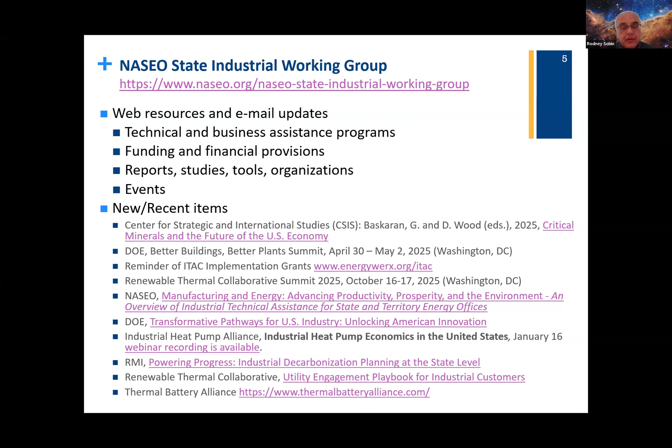I think, Neil, we have ACEEE reports as well on our webpage, to which, yes, you're quite welcome—we alert our members and the wider community. And we also want to point to a newly formed Thermal Battery Alliance. Next, please. So some other activities.

Some of you on this may recall our last webinar in January, which was focused on Pennsylvania and the Pennsylvania RISE PA program, as well as technical assistance offerings. Prior to that, we had a forum focused on industrial heat electrification and storage. We also had, earlier last year, a focus on industrial demand flexibility and a forum on state and local pollution prevention programs and small business environmental assistance. I also listed a response to a DOE request for information on transforming industry, to which we contributed.

We are very interested in your views on potential topics for future webinars and forums—a few possibilities are listed there. We are also very interested in your state's case studies, experiences, different organizations, and we'd love to share the great work that you're doing and have peer exchange.

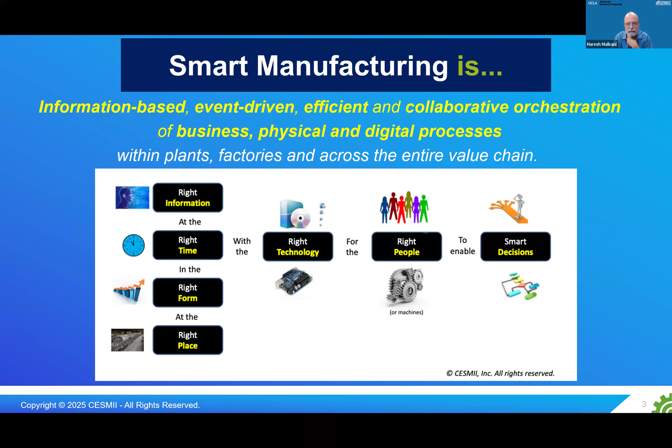If you look at the bottom left, it's all about descriptive analytics, meaning you need to know what's going on. And if you start there, the first thing you do in your manufacturing process is have some way of measuring what you're doing. So you've got sensors, and you could have advanced sensors. One of the examples I'll show you is a sensor that did not exist for a particular use case, and we helped fund the creation of that sensor.

Once you get the sensing done, you're basically creating data, and that data can be immediately used for control purposes if it happens to be something fairly straightforward and simple. So for example, speed control, tension control, or something like that in a piece of equipment—then you can immediately use that data in a control fashion.

But more often, data comes from different places in your manufacturing operation—different sensors, different parts of the process, different parts of the equipment. Therefore, what becomes important is something called contextualization, which provides you with the context of what you're measuring. So if you're measuring temperature, it's on a part being manufactured on that machine at this particular time, at this particular phase in the operation. That's all context, and that's really, really important and powerful.

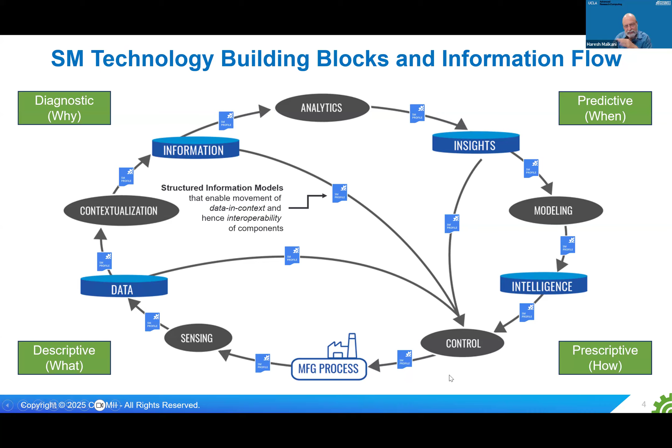So CESMII, we have about $200 million to work with. Half of it comes from the Department of Energy. The other half comes from our members in terms of cash and in-kind contributions. It's a public-private setup that's housed at UCLA. Our headquarters are in Los Angeles. Our staff is about half in Los Angeles area. The other half is across the country. And our goal is to improve productivity and competitiveness through smart manufacturing.

And like I said before, it's all about sensing, control, modeling, analytics, platform. And then the information piece of this is all around reducing the cost and complexity of creating these kinds of systems and then proliferating that for our manufacturers. So within our ecosystem, within our membership, we have representation from manufacturers, systems integrators, machine builders, technology providers, as well as academia and labs, and a lot of the nonprofit organizations and institutions that are part of it. We have about 210 members today, and it's been growing pretty steadily.

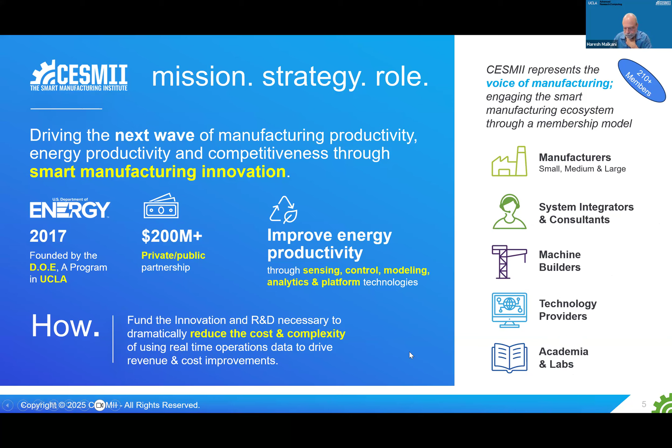So all that stuff is good. What have we done? If I look at like three pillars, the first pillar is all about developing smart technologies to solve hard problems for the manufacturers. So this is where we do a lot of collaborative projects, and we take a look at this oval, and then we got projects that have addressed either certain parts of the oval or the entire oval, depending on the complexity of the problem. And we focused on improving productivity, improving energy usage, quality, yield, and so on. And here are some examples that in the steel and cement industries, we've demonstrated anywhere between 10 and 25% reduction in energy usage through use of smart manufacturing technologies.

The second pillar here is around accelerating smart manufacturing adoption, particularly in small and medium manufacturers and the supply chain. And here, our platform technologies have enabled anywhere from 25 to 50% reduction in the implementation costs of a smart manufacturing solution. Again, these solutions are addressing performance and productivity, but at the same time, as you proliferate those solutions, you're also reducing the cost and complexity of doing so. And this is particularly important for small manufacturers that could be part of multiple supply chains, not just one.

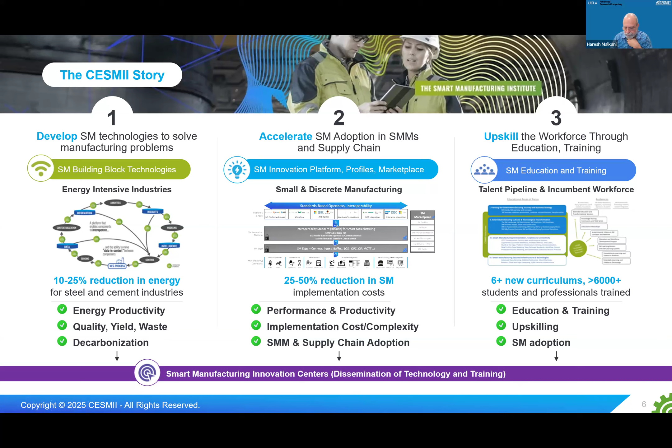I'm going to briefly talk about what each of these blocks in our strategy covers: technology, knowledge, and ecosystem. Under technology, there are two main things going on. One is collaborative projects we've used to demonstrate the impact of smart manufacturing in multiple industry verticals—15 of them are shown here—for small, medium, and large manufacturers.

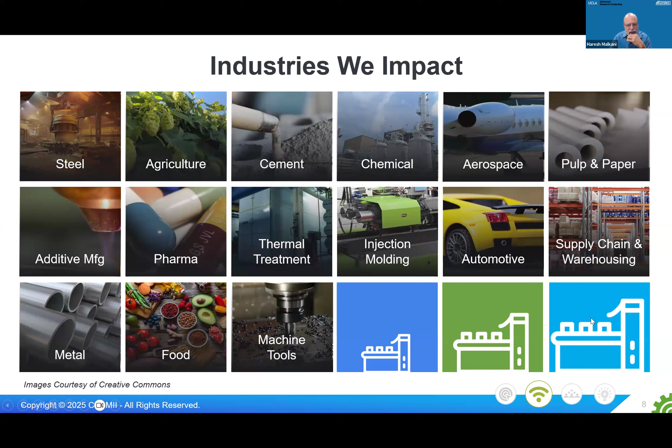Through the 60 or so collaborative projects, we've had use cases that demonstrated the ranges shown here: about 10 to 35% in energy reduction, 10 to almost 40% improvement in productivity for manufacturers in various sectors, and 25 to 50% in implementation costs. These ranges exist because, for a small manufacturer where we've made an impact on productivity, we've had cases where they completely eliminated quality problems or downtime, so those numbers are really high.

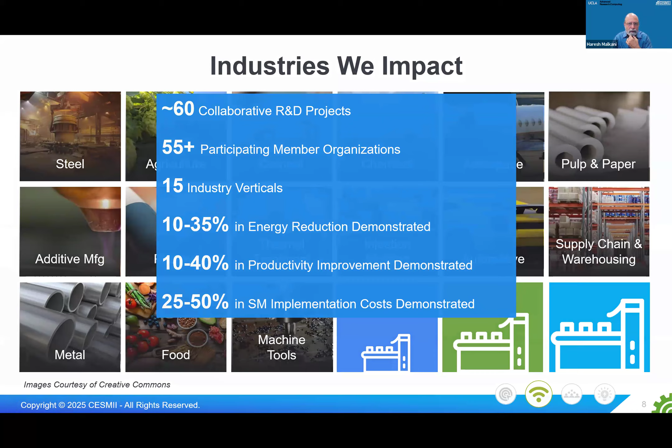The second piece of technology is around the platform—how information moves within a smart manufacturing system. This matters because today a lot of smart manufacturing systems are created by technology vendors with proprietary pathways for collecting, organizing, and utilizing data. If you look at this stack, at the bottom are your physical assets, then some sort of edge that takes the data in and feeds it into a platform, and data is accessed from that platform for different applications.

There's nothing new about this particular stack. What's new is the manner in which data is collected, transmitted, stored, organized, and made available. We are proliferating a standards-based approach to doing that. We don't have skin in the game in terms of proprietary technologies—we are an ecosystem of multiple technology vendors. So we can create best practices and specifications that others can adopt, making this ecosystem more affordable and interoperable, where a best-of-class provider of an HMI or SCADA system can play in that same ecosystem without worrying about proprietary technologies. That's the basis of what we're trying to do here.

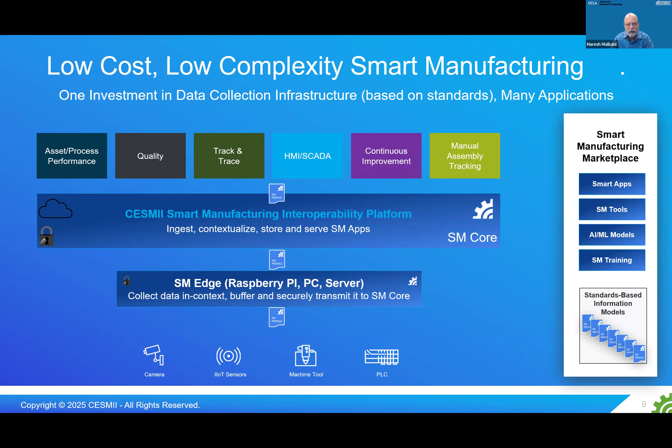The second pillar is around education, and here our goal is to support the ecosystem, expand that network, train them, equip them, certify them. We have curriculum and tools that we generate through our partners, both in academia and in industry. We develop those curriculum and technologies, verify them, and market them—this is all the content, and this is where it is delivered.

We do this through three different mechanisms: consulting support, education support, and technology support. Technology we already talked about. Education support could be through curriculum available online, or through training programs and certification programs we have in our institute. Consulting is where they're looking for a set of experts in certain fields, and through our ecosystem we can make those experts available to help and guide you.

In terms of that process, we have several opportunities that raise your awareness through demonstration days and roadshow opportunities that CESMII does across the country. We actually have a truck that goes out. We also have half-a-day workshops for leadership, because a lot of this around culture and making sure manufacturers understand what smart manufacturing is and how it can help them starts at the leadership level for sponsorship. We have boot camps for folks that want hands-on training, including a smart manufacturing learning kit, the size of a suitcase, that you can take around, along with curriculum and software for hands-on training.

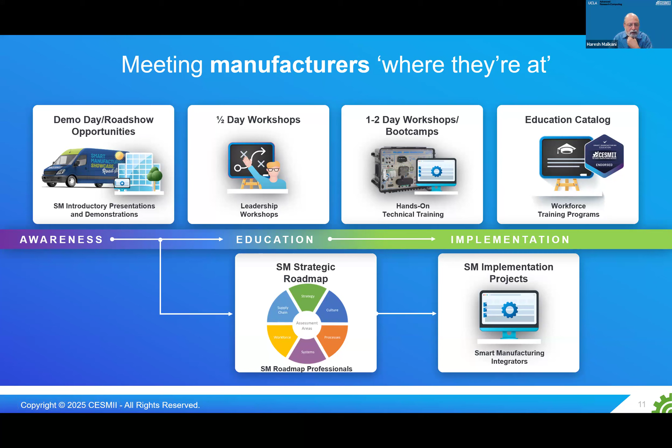And then all this stuff results in implementation projects. There are various ways in which this can be supported for manufacturers, depending on the type of project and the type of funding opportunities they would like to pursue.

And the last piece of this is the ecosystem. We have 210 members. I won't go through all the logos here, but we have roughly 60% representation from industry, 40% from academia, national labs, consultants, and nonprofits. It's a fairly rich ecosystem.

Like I said in one of my previous slides, about 50 to 60 of these members have been involved directly in some of the collaborative projects. Others have been involved in developing our platform technologies. So it's a good family.

Our innovation centers around the country are all listed here at the bottom, and they've been doing fantastic work in assessments and surveys—over 1,000 done. We've now reached about 7,000 a year in terms of our run rate for the number of students educated, and the upskilling of workers is 6,000 a year. So this is rapidly growing through our ecosystem of partners.

You are in the Northeast Pennsylvania area, so the closest one for you would be RPI. Okay, so that's basically the overall story of CESMII and smart manufacturing.

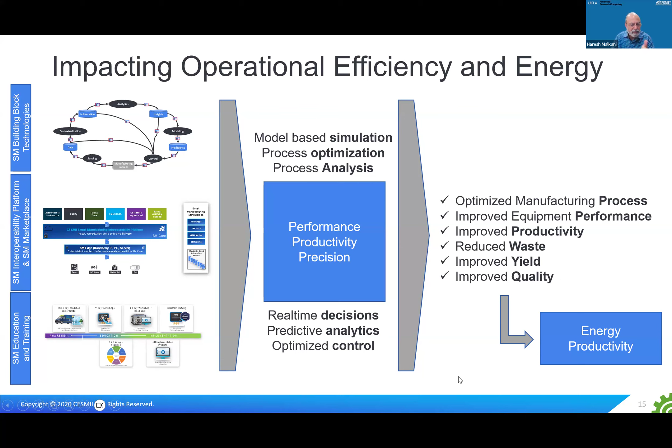But before I get there, at a high level, what I've shown is that all of these things on the left-hand side—the building block technology, the platform technology, the education and workforce—essentially end up producing an optimized manufacturing process that impacts things like performance, productivity, waste, yield, and quality. Now, we don't change the manufacturing process. The way we impact energy is by making all of these other things more efficient, so that you eventually have an impact on energy. The examples we're going to show will illustrate that concept.

Out of the 60 projects we've done, we've laid them out as an example, marching along this oval: here are examples where we've created new sensing technologies, here are examples where we've created some of the platform technologies for contextualization and analytics. On the right-hand side is the predictive model, and then finally bringing it all together for the prescriptive model-based control of the manufacturing process. You can see the types of industries we've touched upon here in these examples—a lot of cross-cutting work we've been able to do.

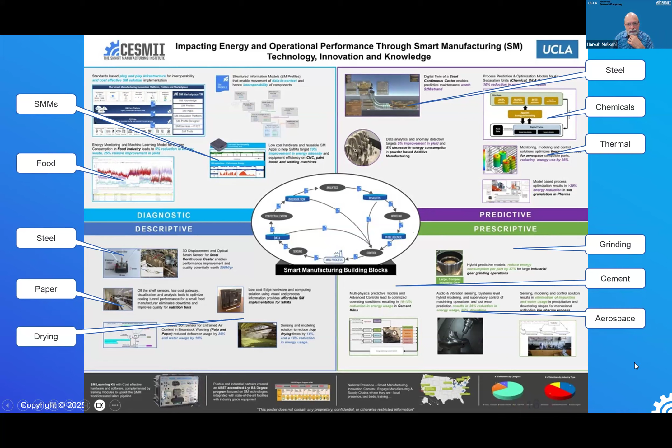And with that, we'll go over to the first use case. So Mark, I'll have you spend 3 to 5 minutes on this one, because this is really a fantastic example of how we've been able to use smart manufacturing technologies for a key industry sector.

All right, thank you, Haresh, and I appreciate the opportunity to come talk to you all here. Over the last 4 years, we have been involved with our industry partner, Argos USA, a large cement producer. There are no small cement producers in this country.

What we were looking at in particular was the process used to create Portland cement. This has been going on for over a century. We basically make it the same way we've done over these multiple decades, though there has been refining of the process as they go along.

They use a lot of sensors primarily to protect the equipment used in the manufacture. These are multi-million-dollar investments. Basically, the process of making cement is taking limestone, calcining it, then taking that lime, calcium oxide, and converting it into calcium silicates. Those calcium silicates, when ground, form Portland cement, which we use in huge amounts throughout the US and worldwide.

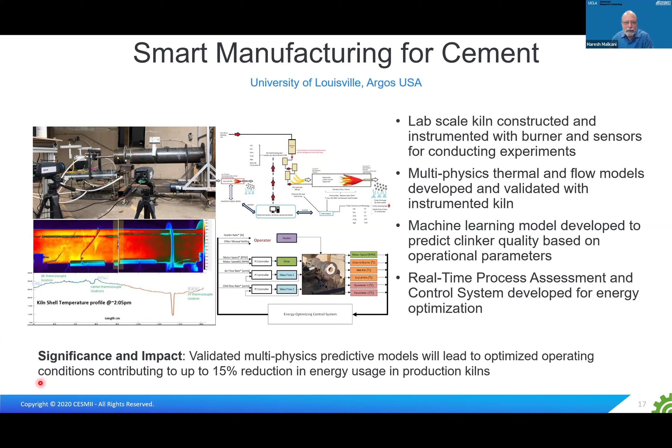Thank you. I'm going to show you a couple other cases. Mark, you're welcome to hang on, and if there are questions at the end, you could probably help answer as well if you have time. Otherwise, I'll take them on. I'll stay.

Here's an example of the steel industry. For the steel industry, if you're familiar, the continuous casting process is used by, I don't know the exact number, but like 90% of steel producers or something like that now. One of the critical things there is to be able to detect where the molten metal becomes solid in this process, and that controls to a majority degree the quality of the slab that comes out.

One of the challenges there was to be able to measure exactly where that occurs and in what way. So there are two different sensors that were created by Missouri Science and Technology. One was a 3D displacement sensor that sits on one of these wedges, and then also an optical strain sensor that also sits around that. They have to operate in this harsh environment. That was one of the collaborative projects they did.

And then Purdue developed a digital twin of the caster so that you could run it, hook it up to real-time data, and use it as a tool for engineers, both in process development as well as in maintenance, to do that predictively. So again, a lot of good work was done here collaboratively - model development, sensor development, and then bringing it together.

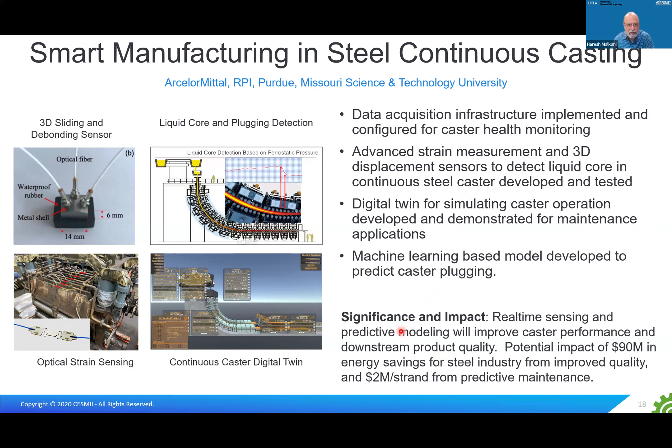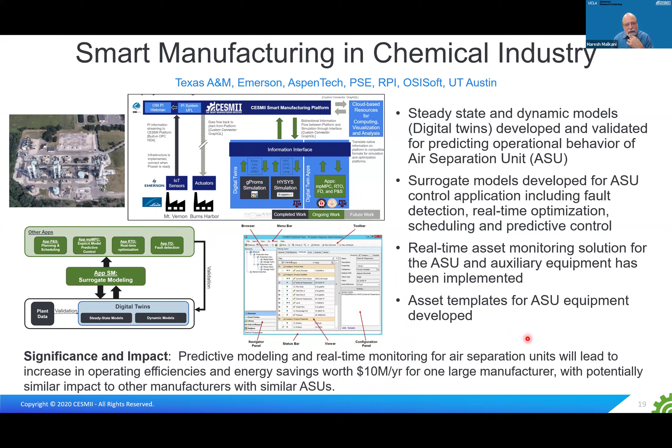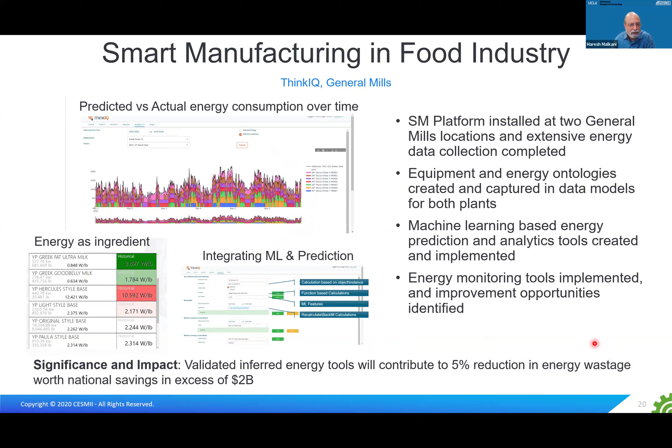The other thing they did here is that they did this in two plants. The first plant actually had the sensors on the ground. The second plant didn't, but they used the same model from the first plant, applied it to the second plant, and it came out to be pretty close to what they would have wanted. Of course, some tweaking is required as always, but they got them started pretty quickly.

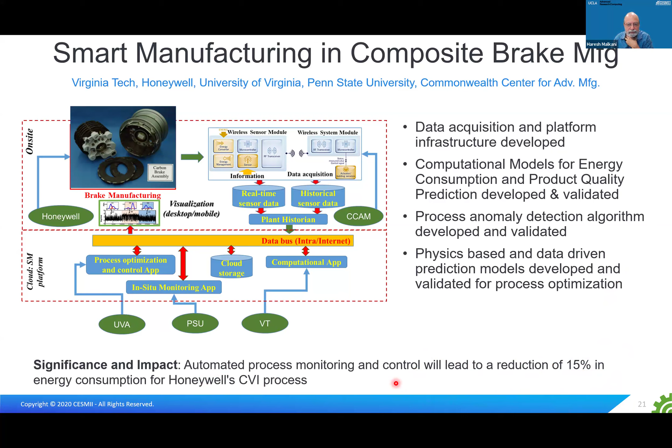Okay, so that was my last slide. I know we went through the examples a little quicker, but I wanted to give some time for Q&A so that we can also have some discussions around any content you've seen today.

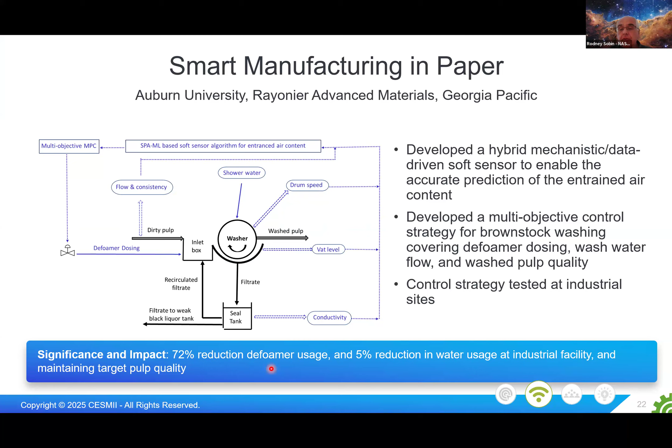Thank you so much, Haresh and Mark. That was great. There is a question in the chat, but before we do that, I would like to ask a question about how state energy offices and other agencies and programs can engage with CESMII - not only government agencies, but also technical and business assistance providers in the states. What's the best way to work with you and your network?

Yeah, there's a couple of ways. We actually have a memorandum of understanding with the MEP network, so we directly work with them. They have been part of some of our regional events and road shows.

And through them, we get connected through the local ecosystems, whether they are of the manufacturers or the nonprofits and other agencies that are working with them in that region. CESMII is now the technical assistance field manager for the state manufacturing leadership program through MESC. I think many of you may be familiar with that particular organization in DOE. That's another mechanism through which we actually get engaged with the folks that you're mentioning. Mark is part of an industrial assessment center at Louisville, so again, through that, we have connections there. And our membership model is kind of set up in a way that you could actually have any of those agencies and partners come in at whatever level is appropriate for them.